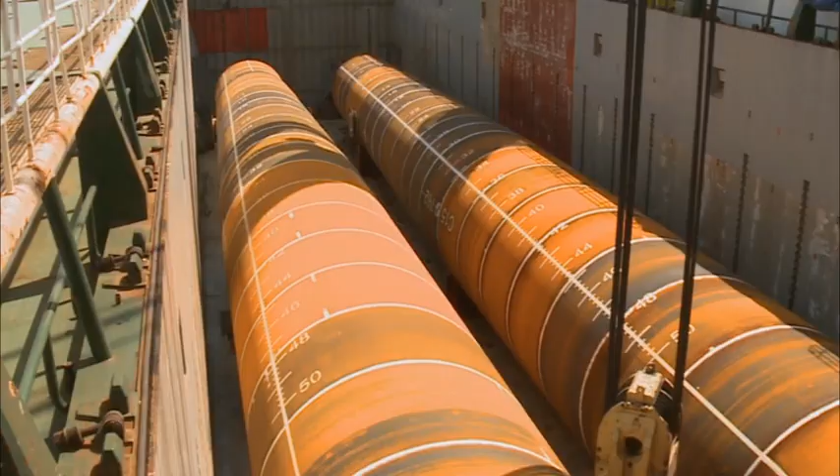From its inception in 1968, Jumbo has been a privately owned shipping company for heavy lift and project cargo. The first vessel, MV Stella Prima, was equipped with 4 12-ton derricks. Over the years, Jumbo's vessels have evolved, becoming stronger, more efficient, and above all, safer.

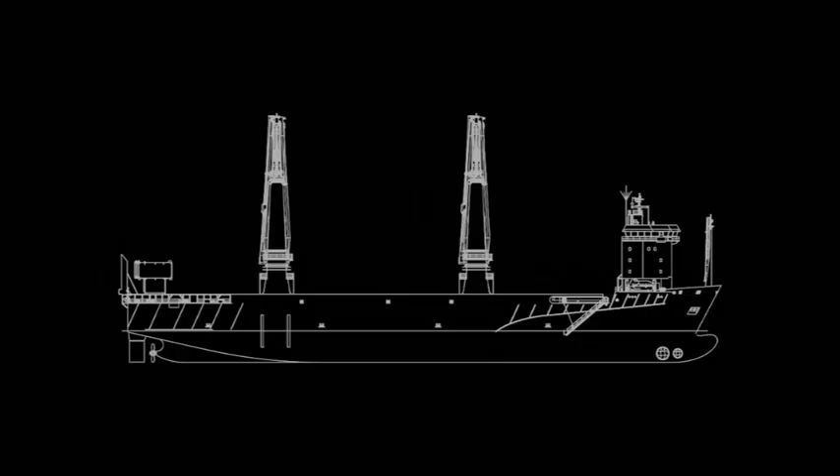Jumbo's current flagships are its 4 J-class vessels, Jumbo Javelin, Fair Partner, Fair Player, and Jumbo Jubilee, which can lift up to 1,800 tons. Jumbo owns and operates a fleet of 12 in-house designed vessels, employs over 500 people, and is market leader in heavy lift transport.

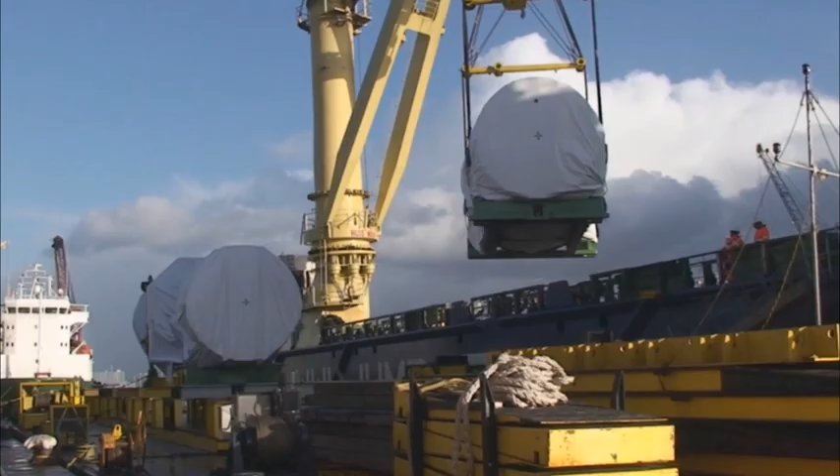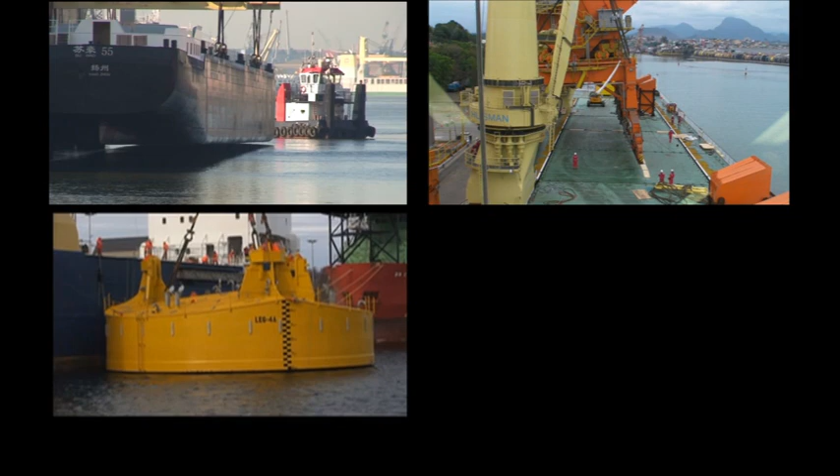Jumbo serves a wide variety of markets, including the oil and gas industry and mining. Regular transportation also includes the delivery of offshore supply materials, cranes and port utility equipment, amongst other things.

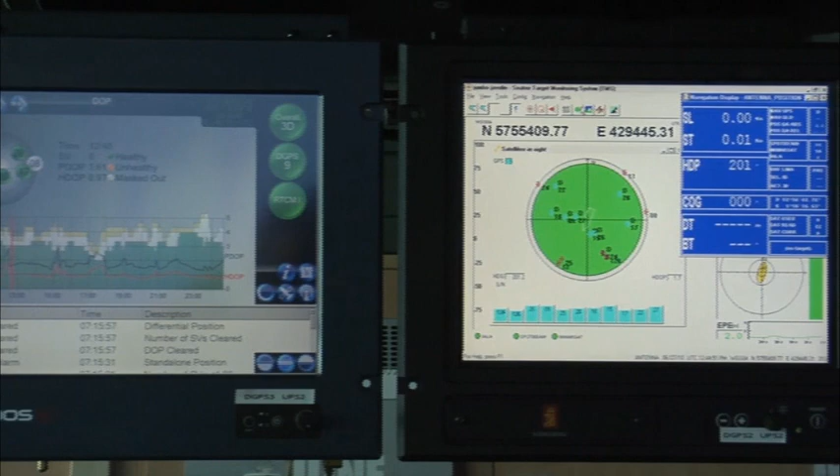To expand Jumbo's scope of work and meet the requirements for offshore solutions, both Jumbo Javelin and Fair Player are equipped with DP2 systems to maintain position whilst carrying out installation projects. In addition, Fair Player is also outfitted with a deep water deployment system to facilitate heavy installation work at water depths up to 3,000 meters.

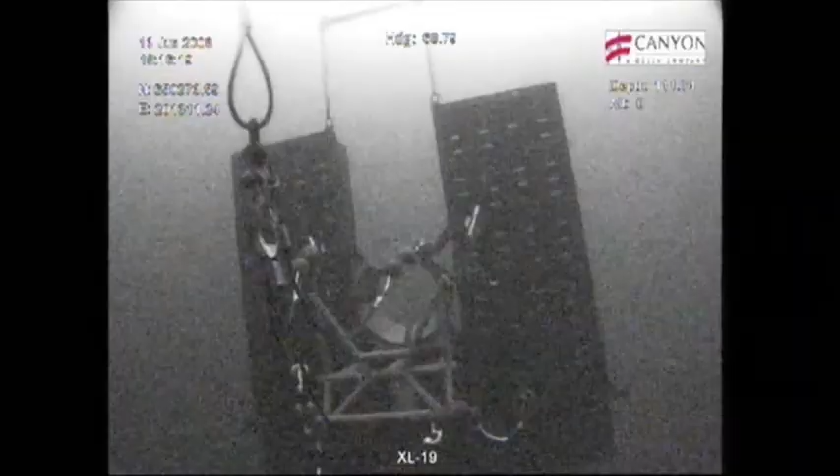As a result of this innovative equipment, these purpose-built heavy lift vessels are perfectly suited for the provision of transportation and installation services.

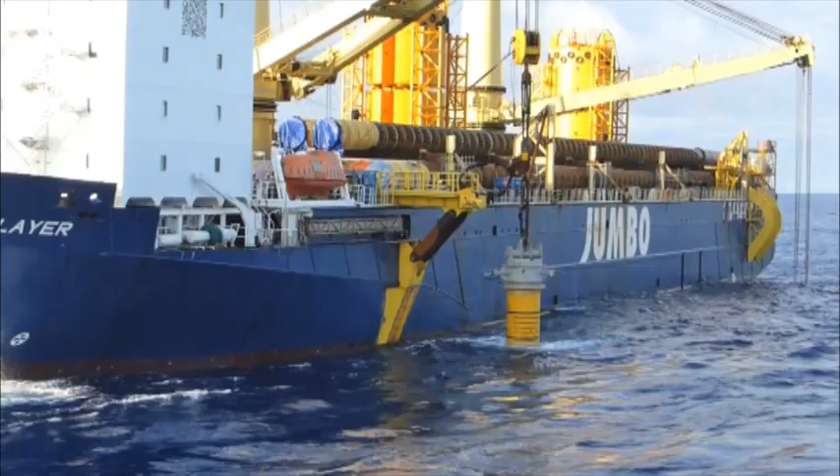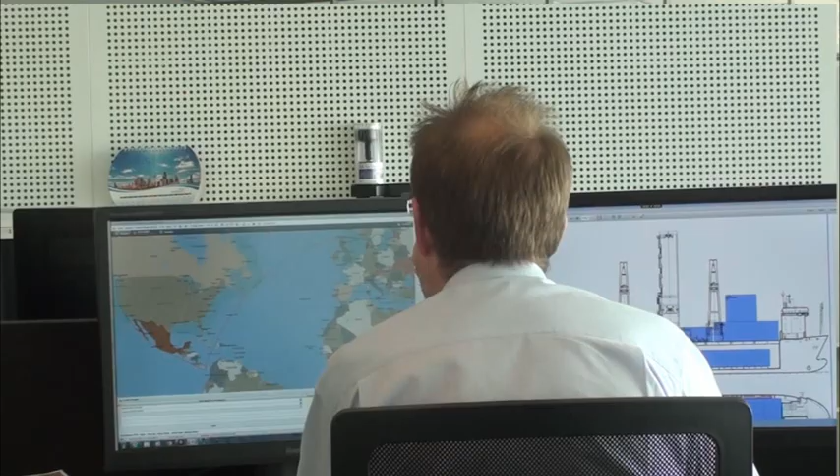Jumbo has a wealth of experience and a good reputation, both gained over 45 years of reliably providing innovative solutions. At Jumbo's headquarters in Schiedam, daily transport inquiries are dealt with by the commercial department. They work closely with the inquiry engineers who study the inquiry in detail on technical merit and project feasibility.

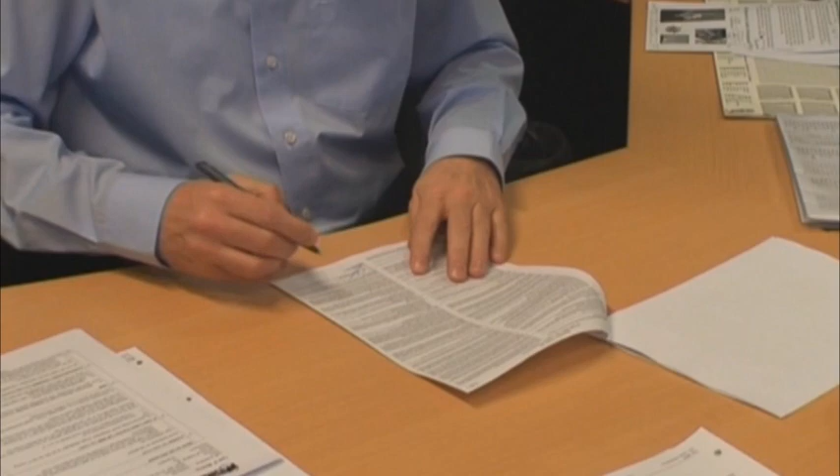All proposed projects are investigated to find out what expertise is needed to load and unload the cargo, as well as how long each aspect of an operation will take and what extra equipment may be necessary. When the client is satisfied with Jumbo's solution, the contract is signed and the shipment of the cargo is planned.

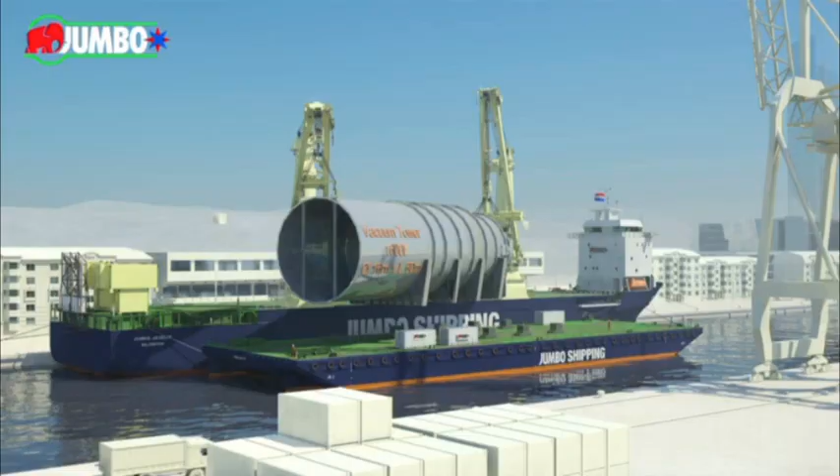Next, the project engineer starts with the technical preparation of the job. In order to get a better insight of complex loading and unloading operations, Jumbo frequently prepares 3D simulations in which all aspects of a project are studied in detail.

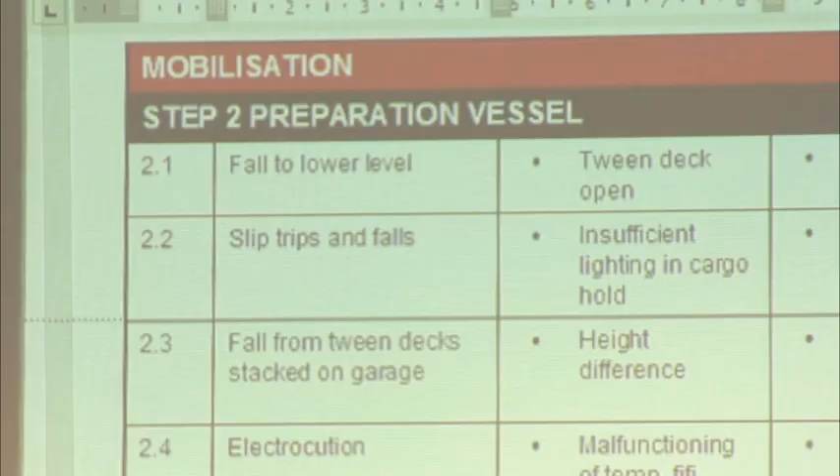When all technical preparations are completed, the operational department, in close cooperation with the cargo superintendent, starts with the final organization and planning of the project. Agents and stevedores are appointed, ship, quay and cargo are prepared, and all documents are completed for the loading or unloading operation. All parties involved are continuously updated on the latest time schedule.

After extensive preparation in the office, it is now up to the ship's crew to execute the project safely and to the full satisfaction of the client.

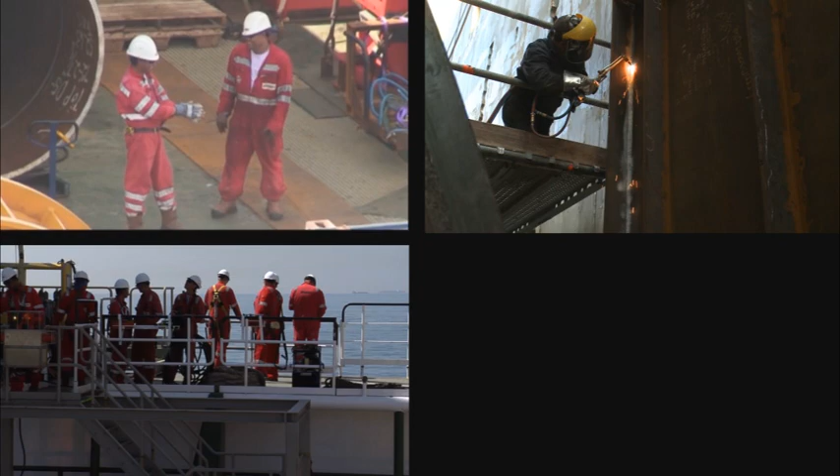A standard crew on board of a Jumbo vessel consists of between 14 and 20 persons. This includes the captain, 3 officers, 3 engineers, a boatswain, a craftsman, deck crew, and a cook. The captain is in charge and is responsible for the stability of the vessel, the lifting of heavy cargo, and the administration, as well as many other affairs on board.

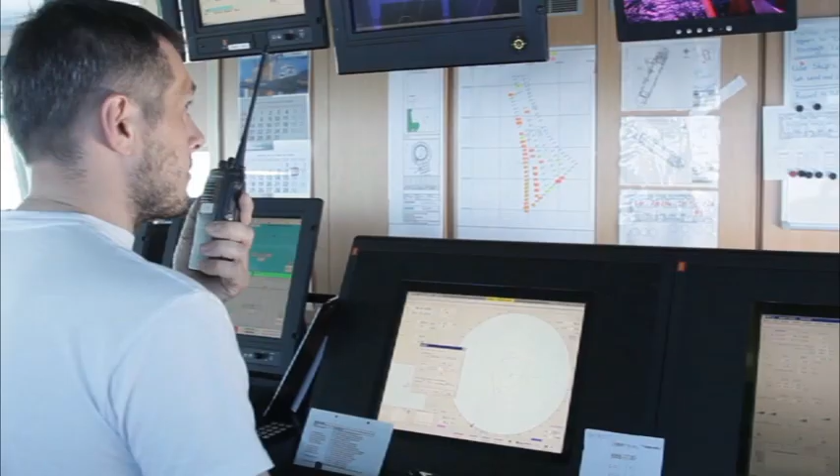The first officer is in charge of the daily operations on board, assists the captain during lifting operations, and is responsible for all work on deck. He coordinates the rigging of the lifting gear and the sea fastening of cargo.

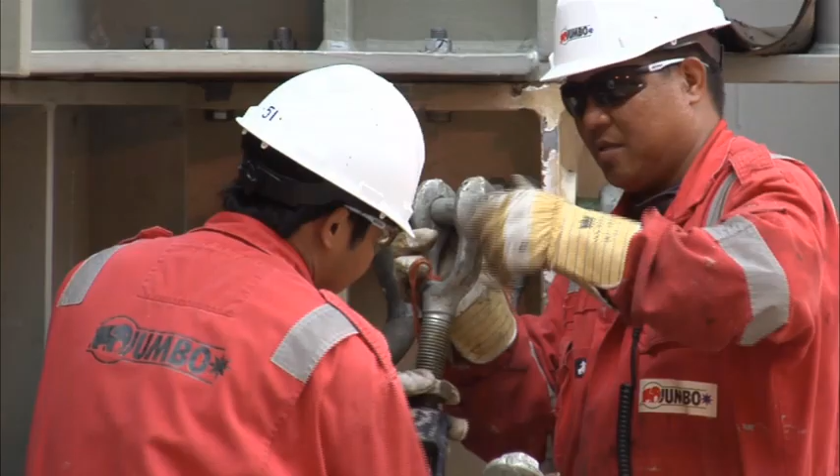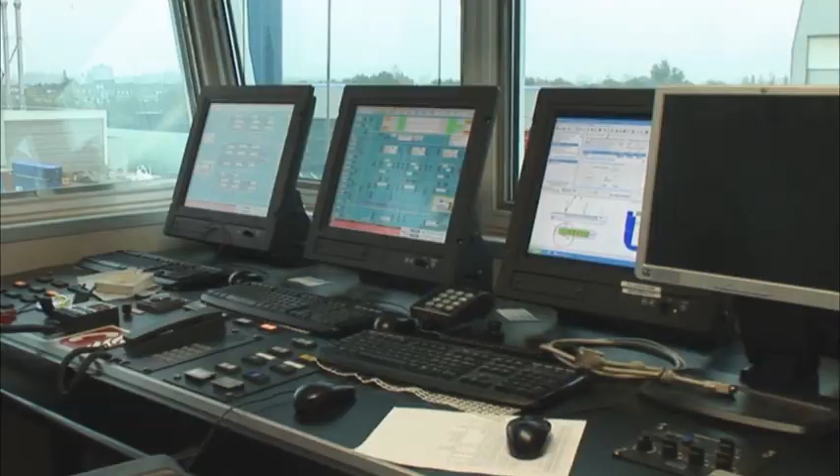The second officer assists the captain and the first mate. He is in charge of operating the ballast system during a lifting operation and is also the safety officer on board. He is responsible for all security-related matters.

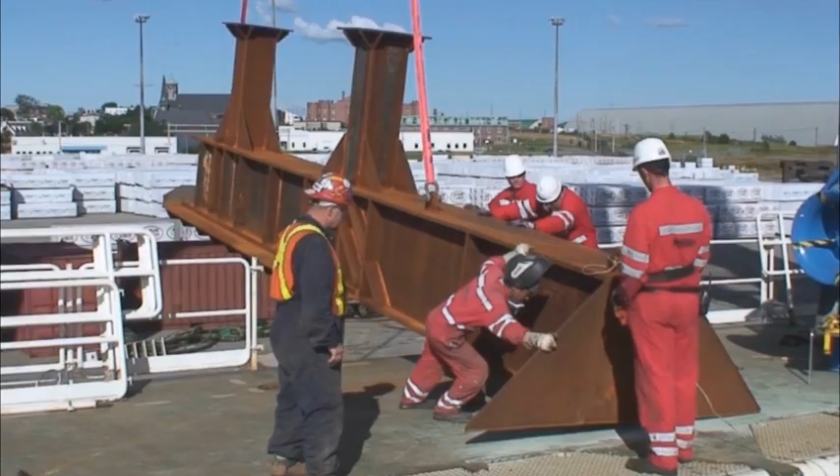The third officer assists in all areas such as, but not limited to, cargo handling, safety, navigation, administration, and all kinds of deck and port activities.

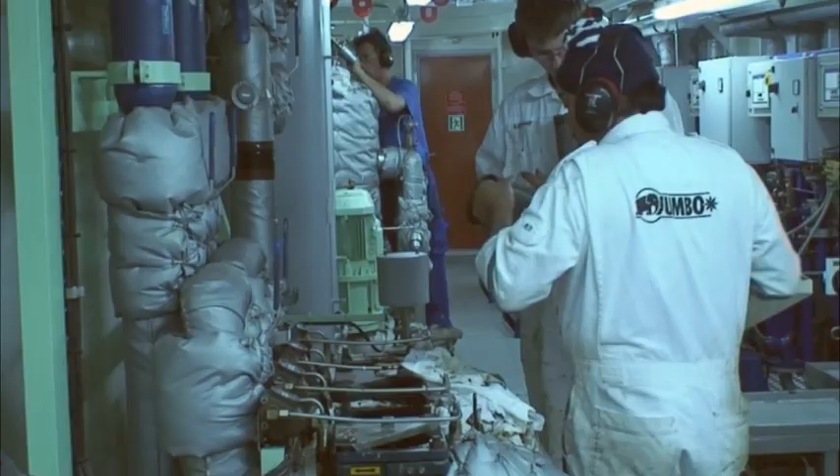Jumbo vessels sail with Dutch and Russian officers, and the sailors are mainly from the Philippines or Cape Verde Islands. At sea, the officers navigate the ship during their watches. In addition, they carry out maintenance, cargo inspection, voyage preparation, and the updating of charts and logbooks.

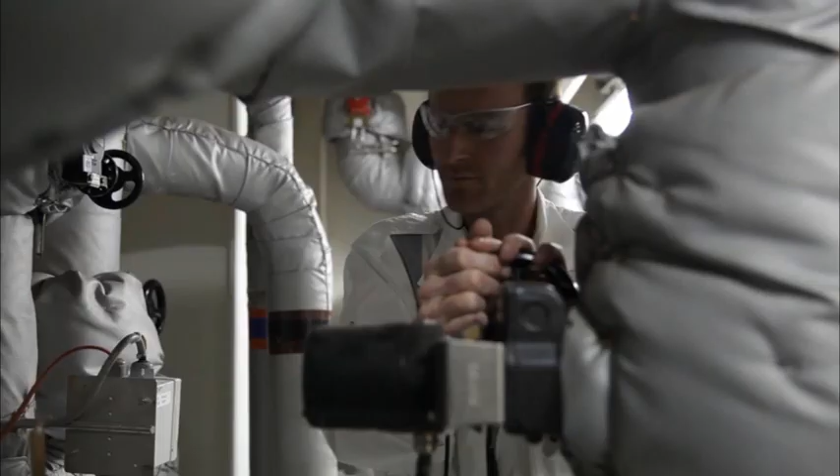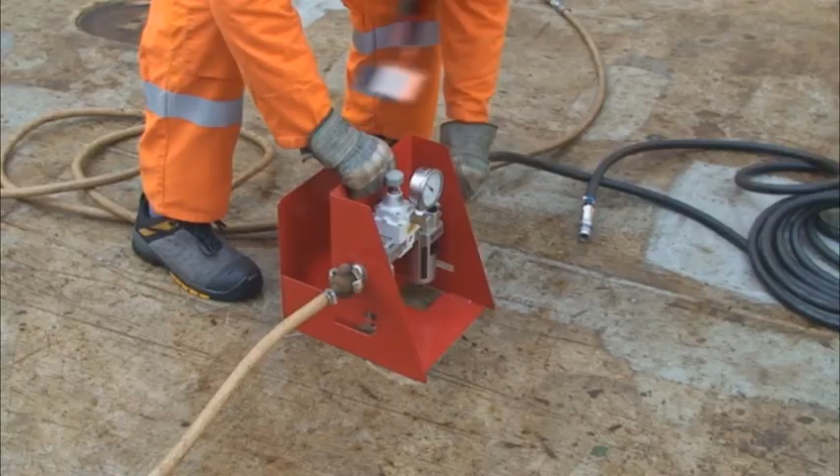The chief engineer is in charge of all technical issues on board and coordinates his team of engineers. The engineers on board of a Jumbo vessel are true all-round technicians, and there is always something that needs their attention. They solve problems and take care of maintenance of all systems on board, from pneumatics and electrics to hydraulics.

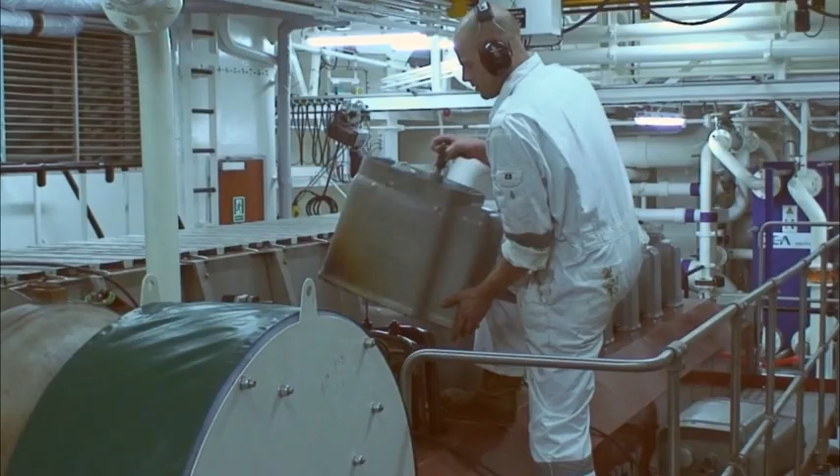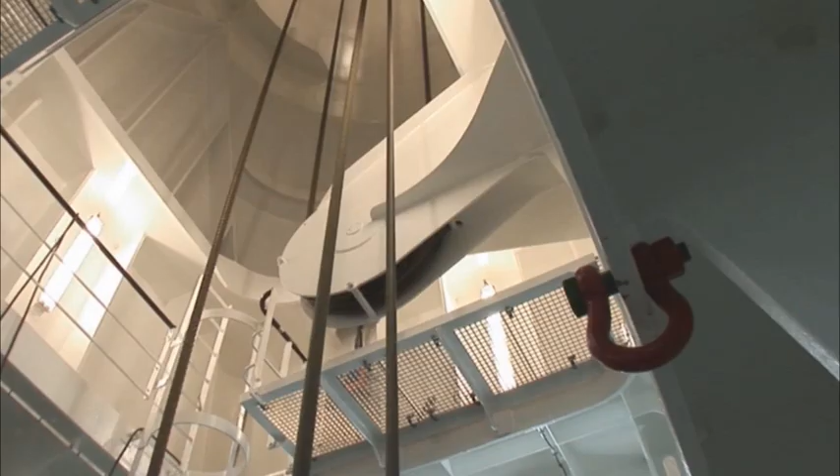The engineers' work takes place during the daytime, and their focus is on system checking and problem solving. The engine room is fully automatic and therefore most of the time unmanned. The engineers, who have a wealth of experience, are often required to work alone. During lifting of heavy loads, they mainly focus on the power supply on board, as well as the operational aspects of both onboard mast cranes.

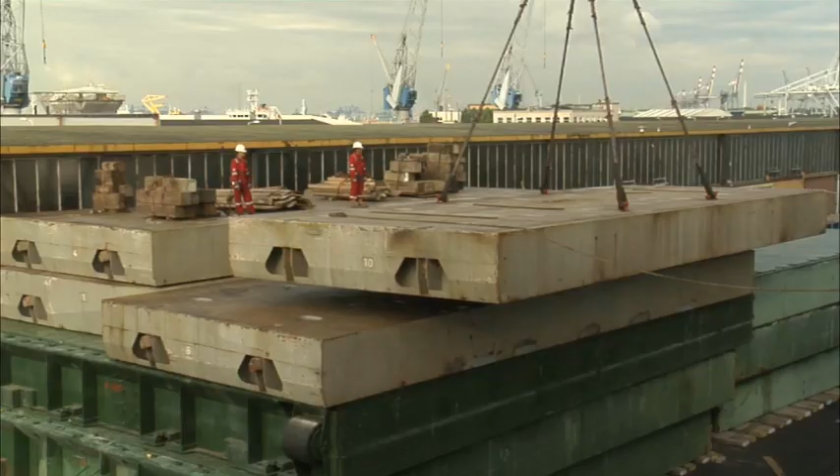The deck crew, alongside the officers and engineers, is also an essential part of operations. Their job includes securing and removing the sea fastening and assisting during a lifting operation. The thorough preparation and careful execution of each and every project guarantees a good result. It also explains why Jumbo has so many long-term trusting relationships with clients. The relaxed atmosphere and no-nonsense mentality guarantees a good working environment.

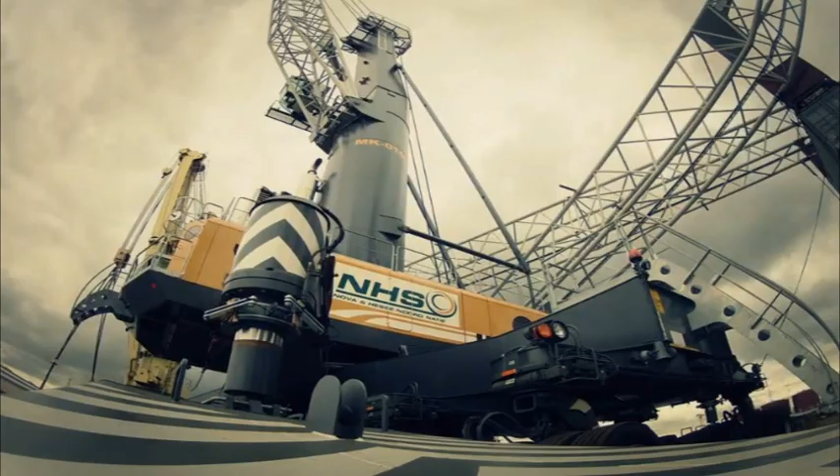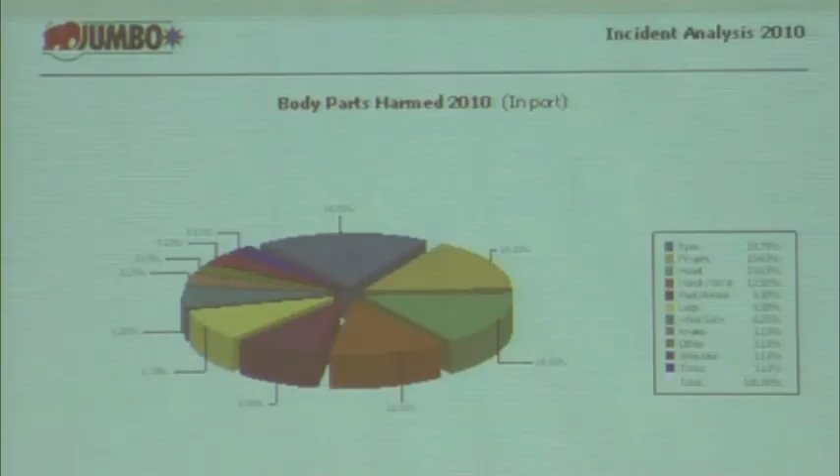The company believes that in this highly specialized and complex field, trust and reliability is key. Because of this, Jumbo is continuously developing both staff and fleet. Regular safety courses and training schedules keep the crew updated on the latest developments with regards to quality and health, safety and environment rules, also known as QHSE regulations.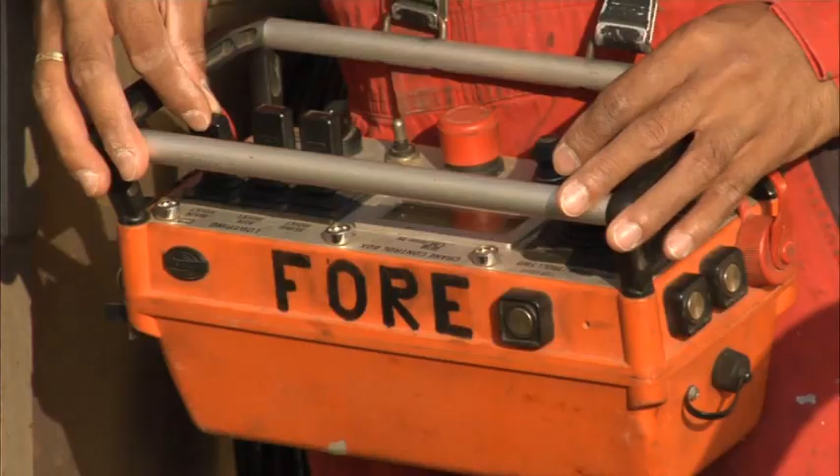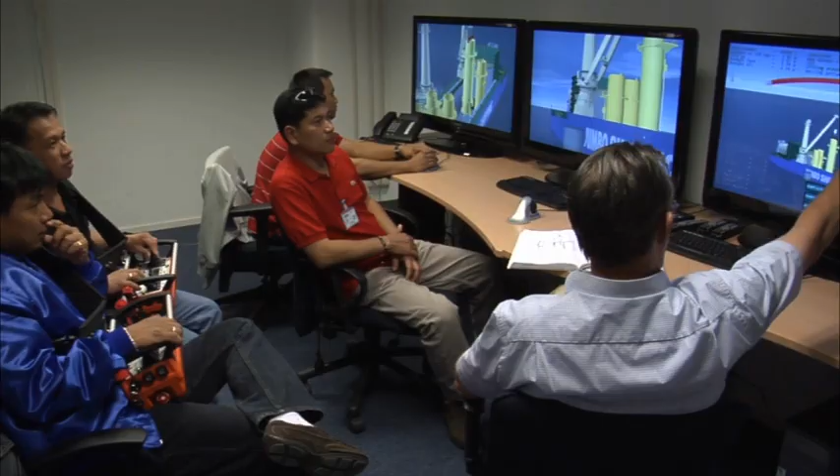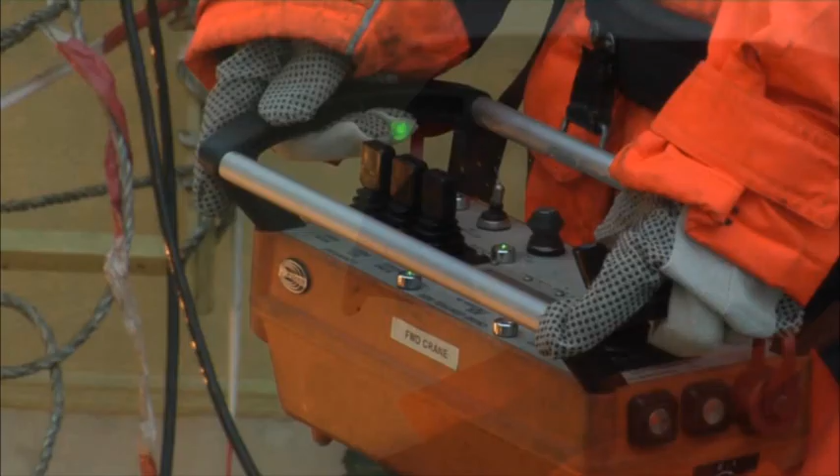The lifting of extreme heavy loads is an industry all of its own. Therefore, Jumbo has initiated the development of a Jumbo Vessel Crane Simulator. At Jumbo headquarters in Schiedam, new vessel crew members are trained by qualified experts to operate the 900 tons mast cranes of the J-class vessels. This is excellent training in preparation for carrying out the real operations on board the vessel.

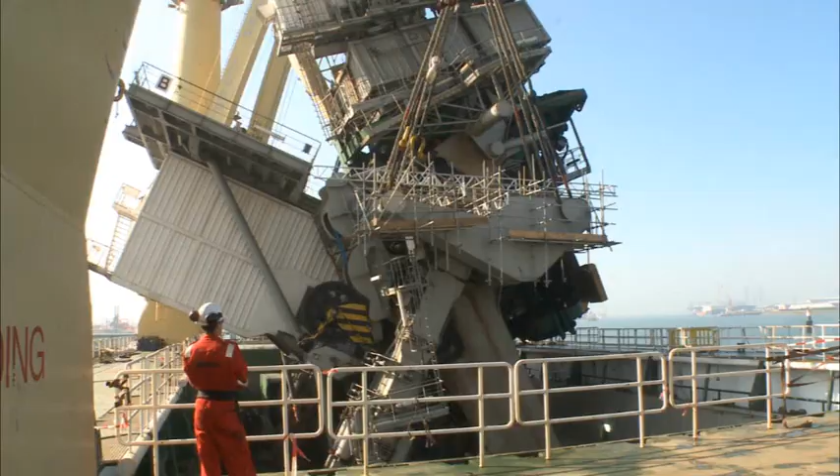Sailing on one of Jumbo's heavy lift vessels is challenging. Every day brings something else and offers a lot of adventure. Jumbo is a proud company, proud of each successfully completed project.

From heavy lifting and safe transport over the oceans to complete transport solutions over land and river.